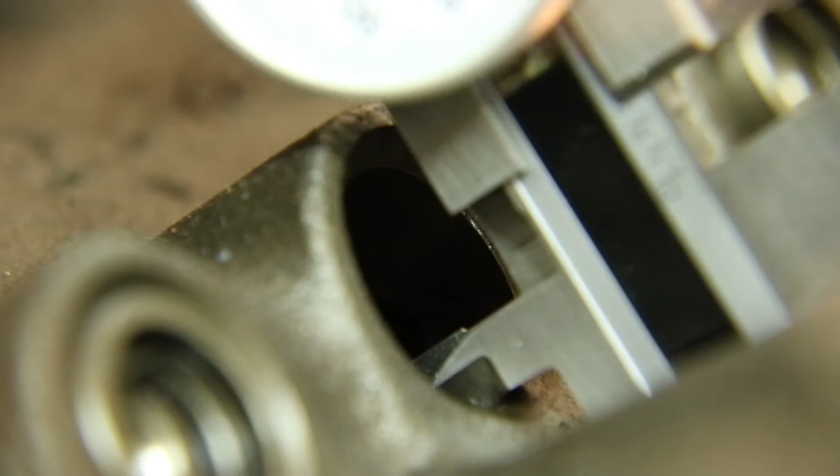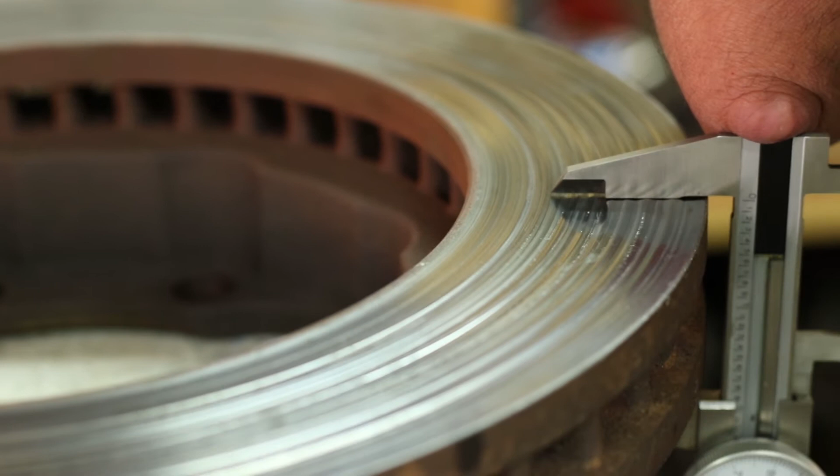A quick heads up, in this video we're using a dial caliper that's of the Imperial design, also known as SAE, also known as standard. So if you happen to be looking for a video on metric, check the video description, you can find more information there. The dial caliper can quickly and easily obtain outside diameter measurements using the outside jaws, inside diameter measurements using the inside jaws, and also depth measurements using the depth rod.

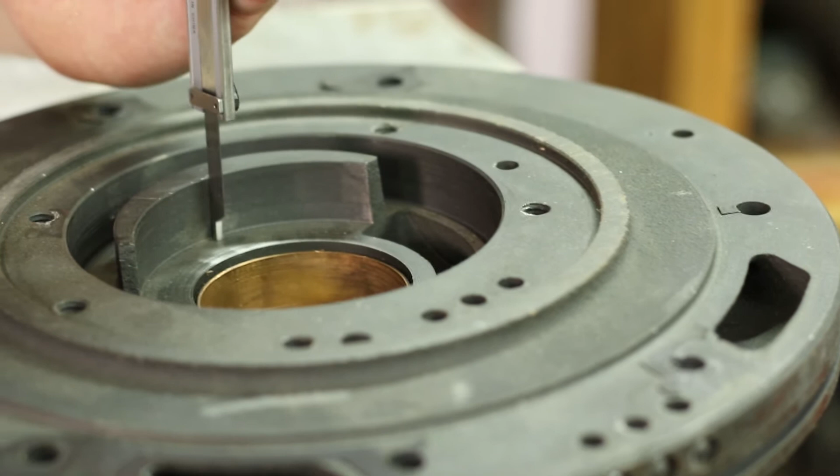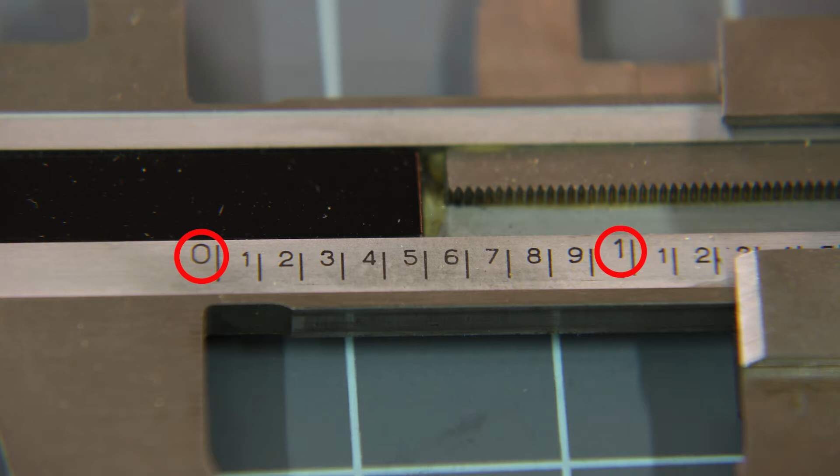The dial caliper is comprised of a graduated beam and a dial indicator. The graduated beam contains numbers, both large font and small font. The large font numbers represent whole numbers, in our case that's whole inches. Looking at the beam, we can see 0, 1 inch, 2 inch, and so on up to 6 inches.

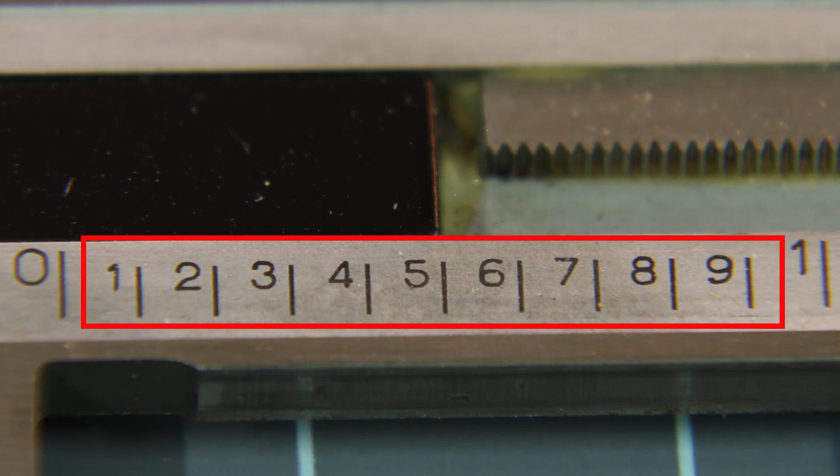The smaller font, located between the whole numbers, represents the tenths of an inch. Part of the lower jaw is used as a reference edge for the numbers located on the beam. You'll notice that there's an empty space located between the tenths position on the graduated beam. This is where the dial indicator comes into the picture.

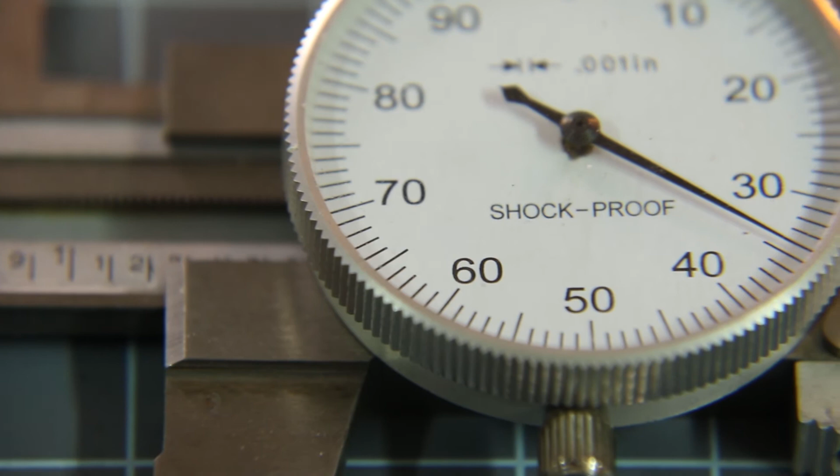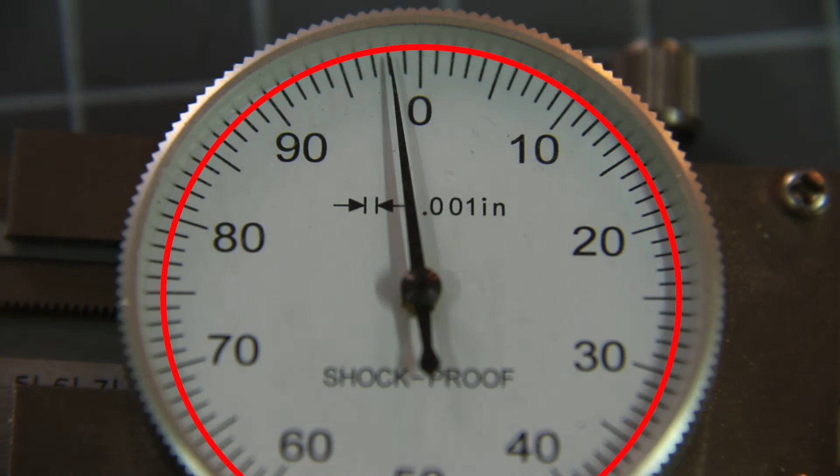Each graduation on the dial is worth 1/1000th of an inch. The dial is comprised of 100 graduations. One revolution of the dial equals 100 thousandths of an inch. One revolution of the dial also equals 1/10th of an inch on the graduated beam. Just to be clear, 100 thousandths of an inch is the same as 1/10th of an inch. They're just simply communicated differently.

Let's use an arbitrary number to see how this works. Nothing more arbitrary than 1, 2, 3, 4. Let's throw a decimal place in there, and now we've got 1 whole, 2 tenths, 3 hundredths, and 4 thousandths. Where do the numbers come from? The two numbers on the left, the 1 and the 2, are always going to come from the graduated beam, where the two numbers on the right are always going to come from the dial. Pretty easy, right?

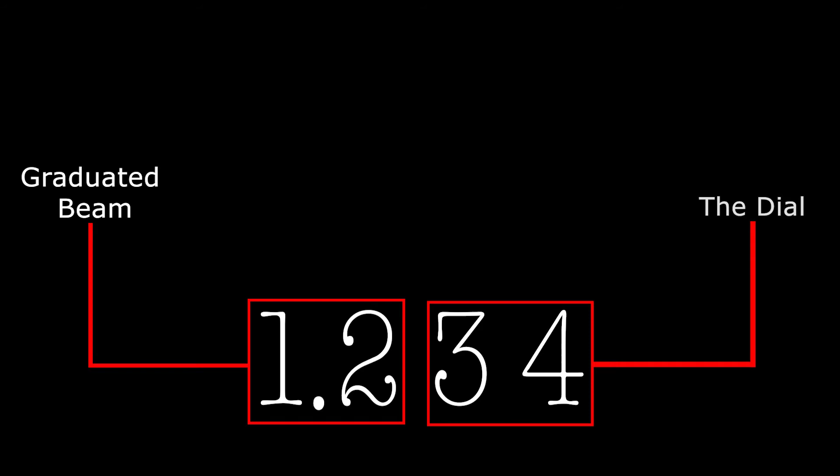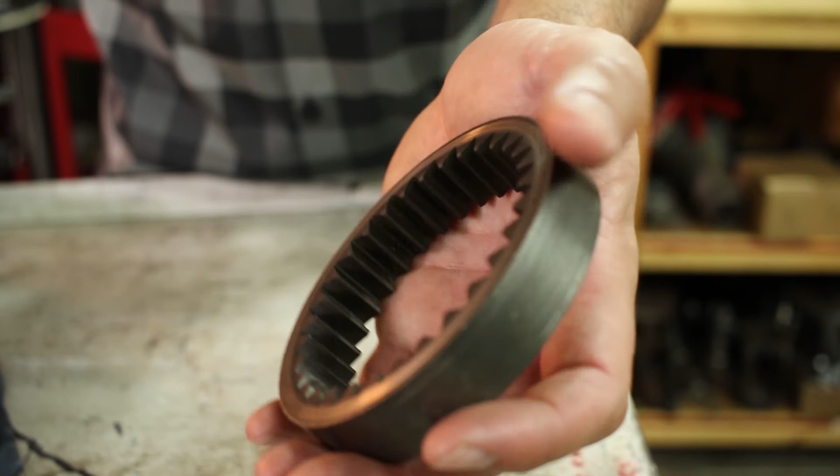Let's grab an outside diameter measurement. This is a pump gear out of an automatic transmission. Let's identify the thickness of it. Place the outside jaws over the part. Gently squeeze the jaws against the pump gear while taking your reading. The pump gear appears to be roughly 708 thousandths of an inch thick. The two numbers on the left come from the graduated beam, while the two numbers on the right come from the dial.

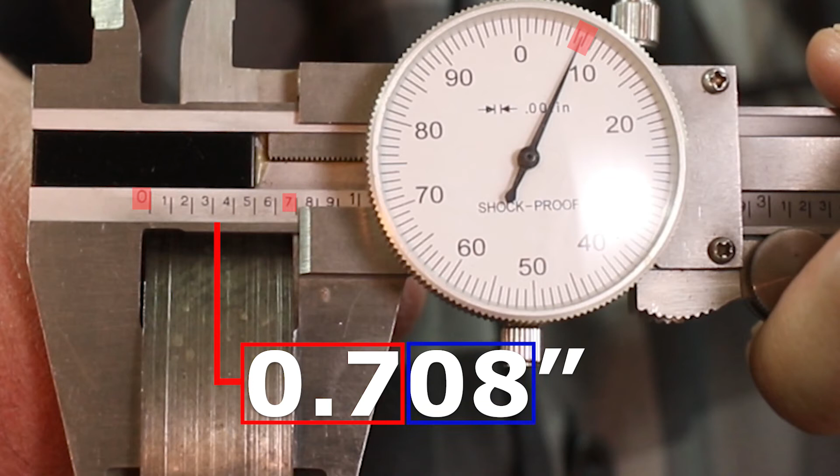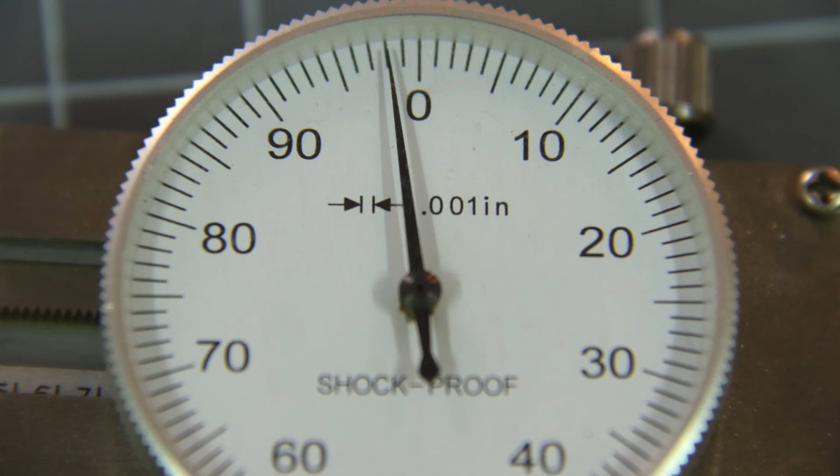Don't be fooled by the tenths place. At first glance, this looks like 2 inches and 4 tenths. After viewing the dial, we can see that we're still 2 thousandths of an inch shy of making it to the 4 tenths mark. Always refer to the dial prior to recording your numbers located on the graduated beam.

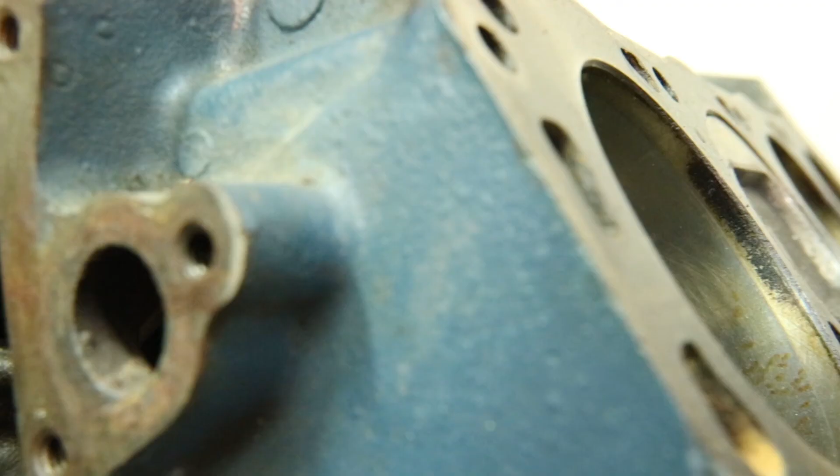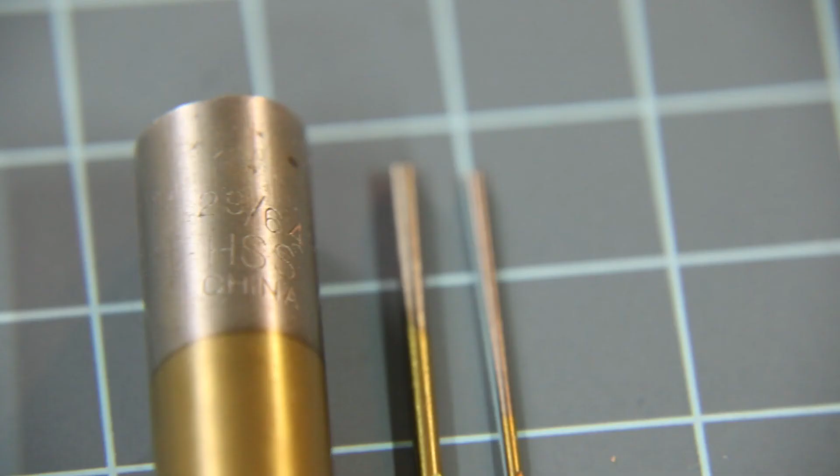The dial caliper is a precision measurement tool of many uses. You can measure brake rotors to see if there's enough metal to safely have them resurfaced. It can be used in automatic transmission repair to adjust clutch pack clearances, measure clutch plates, steel plates, pressure plates, snap rings, etc. It can be used to measure the cylinder bore on an engine. It's great for getting a rough measurement so you can quickly identify whether a cylinder has been bored out. Large drill bits always have the ID stamped into them. However, small drill bits typically don't, a quick measurement tells you what the size is.

As you can see, the dial caliper is very quick and easy to use.